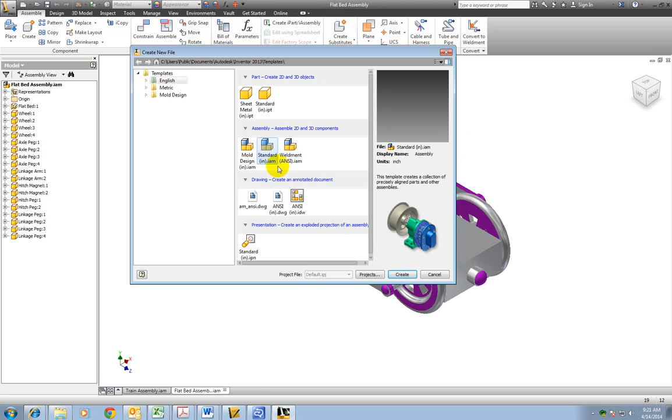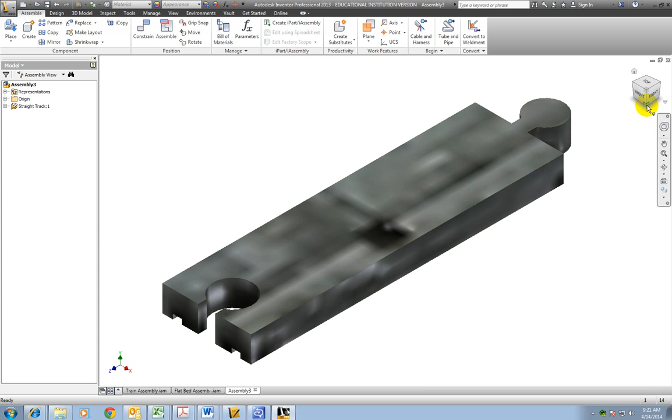Okay, the first thing we need here is the track. So I'm going to click place, go down here, pick up the straight track, open. Alright, now this I need to flip over because I want it sitting the correct way. This is going to be the item that I'm going to have as my ground. Okay.

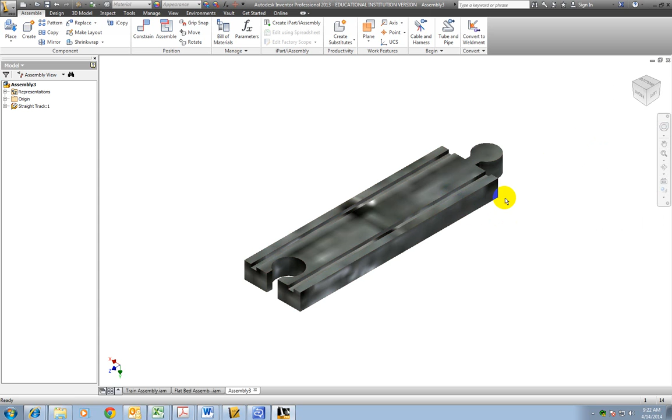I'm going to set this as my home view. And I'm going to put it at a fit to view because I'm getting ready to make it longer. Okay, so instead of constraining each track piece separately, I know it's going to be in a straight line and I want them all to be like one piece. So what I'm going to do instead of constraining them is I'm going to pattern them.

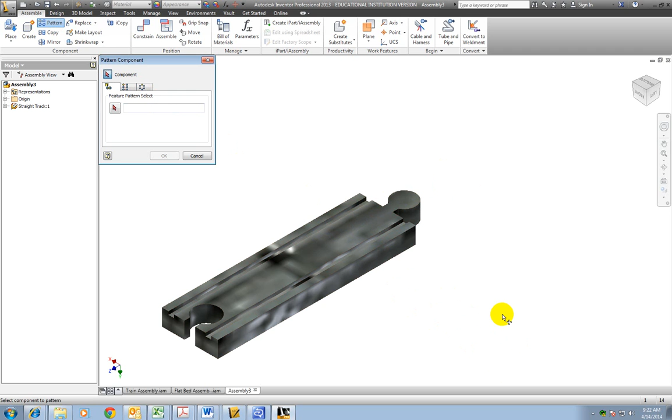Anytime you have more than one item and you're going to have it in a straight line or maybe even in a row next to each other, like if you're putting several chairs into an assembly, you would use the pattern. You can either do it circular or straight, which for me, I want it to be straight. So I pick the component and then I'm going to pick the direction. And of course I can go either way with this, whichever way I want it.

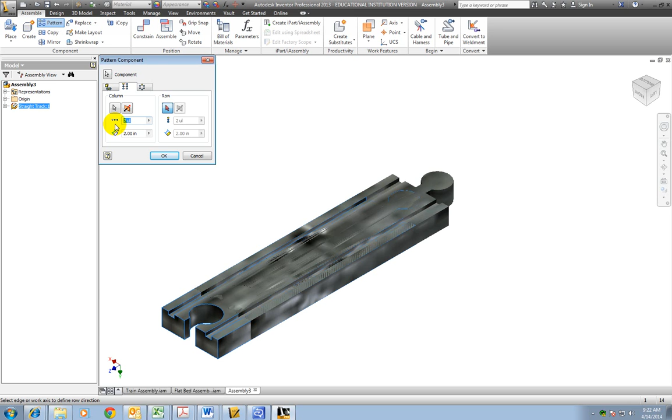Okay. This is how many I want it to be. As it says, it can go up to 2,000. I really only need anywhere from 4 to 6. When we start driving the train down the track, you'll see what I mean on that. I'm going to go ahead and make it 6. You can do anywhere from 4 to 6.

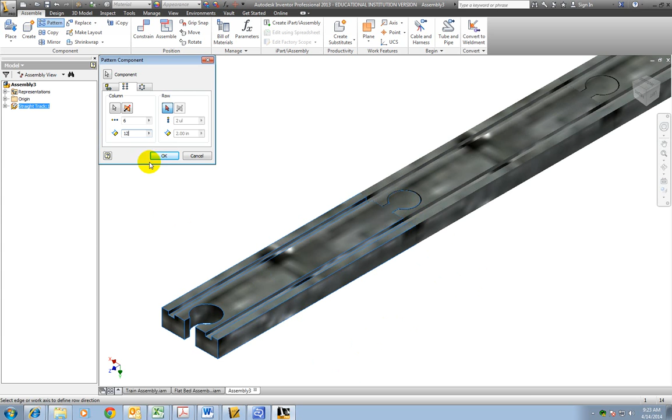Okay. Now, the distance of each of these pieces of track is 12 inches. So I'm going to change this to 12 to show that I need 12 inches between each one from the beginning to the beginning of the next one. And I'm going to click OK. All right, so now if I hit home, it's going to fit that to view. All right, so I'm ready to put the trains on it.

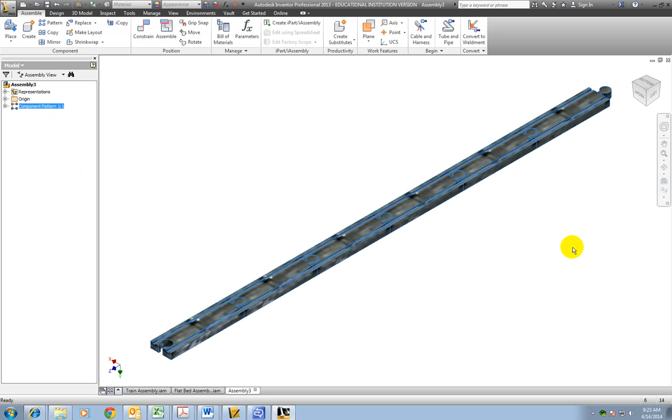As you can see how long this is, that's why I said you don't want any more than 6. And of course later, if you change your mind and you wanted to change the number you had, just right click and you could edit it. All right, but I'm good with what I have. I'm going to go ahead and save this. Save as.

And I'm going to make this the complete train assembly. You can name yours whatever as long as it makes sense, because you want to put the whole train on it and ready to drive. So that's why I say complete train assembly. I'm going to click save.

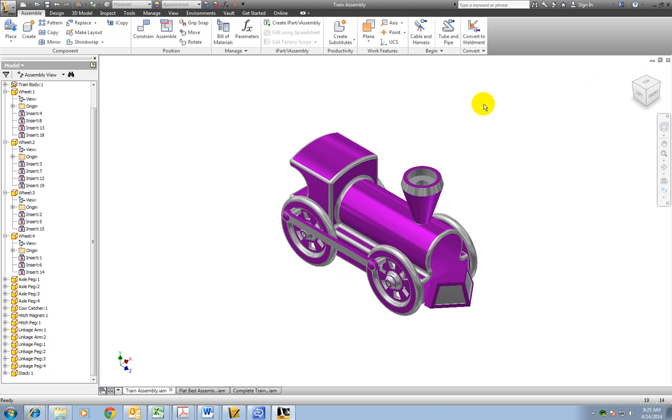So I'm going to have to constrain these wheels so that the wheels move at the same time. But to do that, I'm going to need a plane on my wheels. So click on the wheel, right click, and open it. Right, so I'm going to need a plane somewhere down the middle of this. So I'm going to put an axis on here.

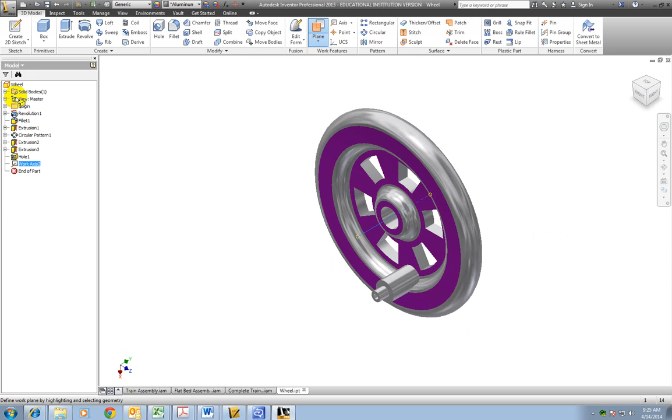And then I'm going to put a plane on that axis. Okay, it doesn't matter if it's 90 degrees or 0 or whatever, but go ahead and accept that. I'm going to save it so that now I can use that plane. Click save.

All right, now I'm going to go back to my train assembly, and now I have a plane on it. I'm going to click Constrain, and I would like when this one moves, I want this one to move at the same time. So I click on Angle, and I'm going to pick the directed angle. When this plane and this plane move, I want them to move together. I'll leave it at 0 degrees. Click Apply.

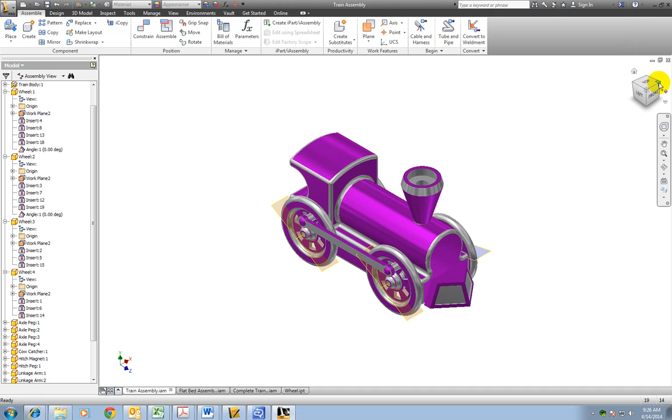Now when one moves, the other one's going to move at the same speed. So when this wheel is up, I want this one to be down. Now I'm going to click Constrain, Angle, the directed angle.

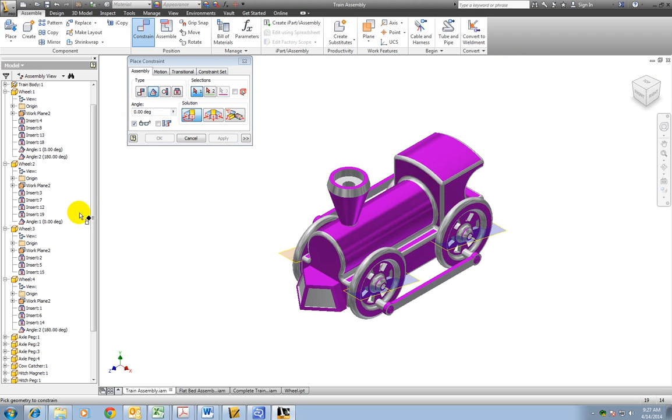When this plane is moving, I want this one to be moving as well. At 0 degrees, see this one's down and that one's down. So let's change this to 180. Now when this one's up, this one's down. Let me click Apply. Now when this one moves, the other one moves.

Now the problem I have is when this one moves, we're just kind of dragging this along. So we need to put that same angle constraint onto the other side, where they are at 0, and click Apply. Now when one moves, the other one moves.

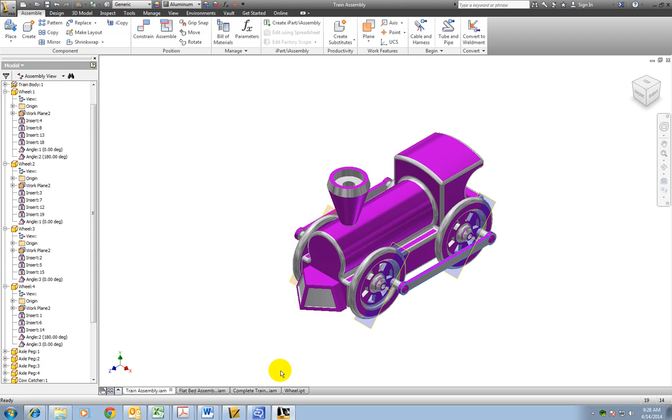Now I need to go - no, actually we'll put that on the flatbed here in a little bit. I just made a flatbed. You've made an actual train car, but I just made a flatbed because I wanted it for the purpose of explaining it to you. We're going to go ahead and leave the planes on there for now because we're not done using them.

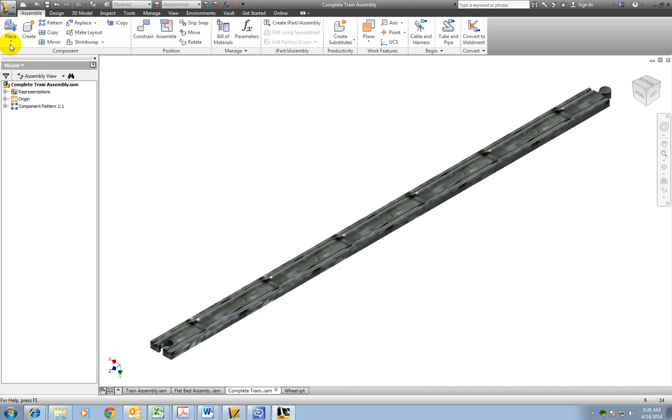Okay, so now I'm ready to put the train engine onto the track. I'm going to place my train assembly onto my complete train assembly. So I'm going to bring it in, left click, right click, OK. And I need to place this now onto the track.

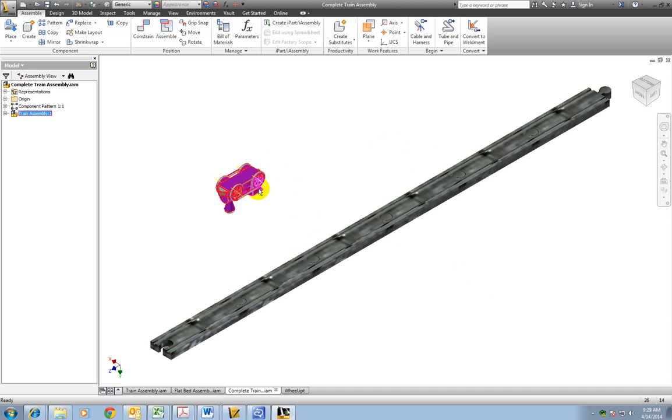Now, if it bothers you that it's upside down, remember you can click on the train, hit G, and it allows you to turn it around. Or I'll go ahead and leave it upside down, because as soon as you put the first constraint on this assembly, it's going to bring it into the direction you want it.

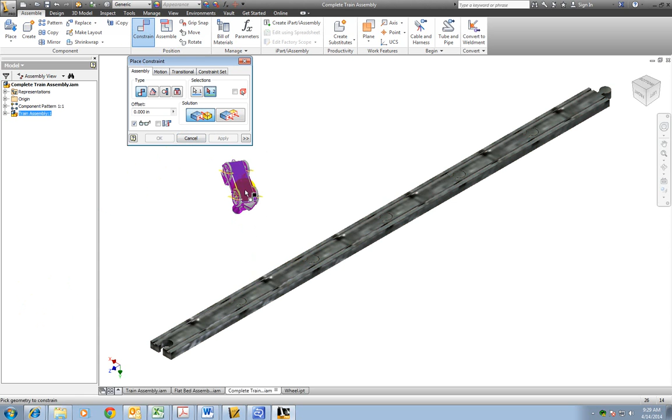Because when I click Constrain, and I'm going to mate the bottom of this train to the top of this track, it's going to bring it in the direction I'm wanting it. Now let's zoom in here for you. I don't want it actually laying on the track because it would be dragging, so instead I need to put an offset of 0.5.

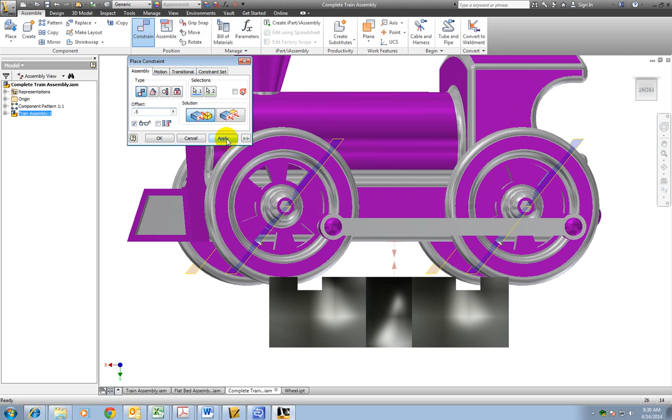I'm going to click Apply on this. And if it's not the right height, I can go back and change that constraint. Okay, so now I want to bring this around.

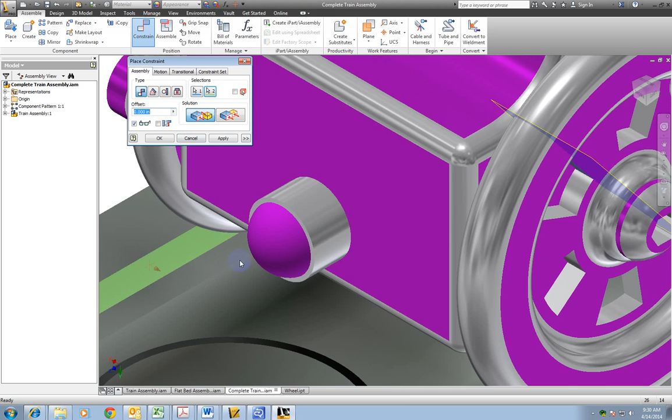So I need to mate this side here with the inside of this track. Now it's going the right direction, but don't hit Apply yet because it's dragging along the sides. So my offset, I'm going to put 0.05, and that looks about right. I'm going to apply this.

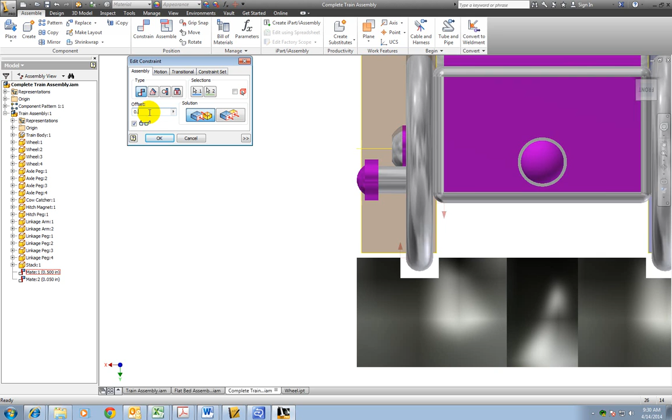They are not down in the grooves. So I'm going to go back to this train assembly, go to this mate, and edit it. Let's make that, instead of 0.5, make it 0.45. Yes, that looks a little bit better. Click OK.

And depending on your measurements, if maybe I looked at different dimensions, or maybe I made mine a little off, or you made yours a little off, those values might be a little different.

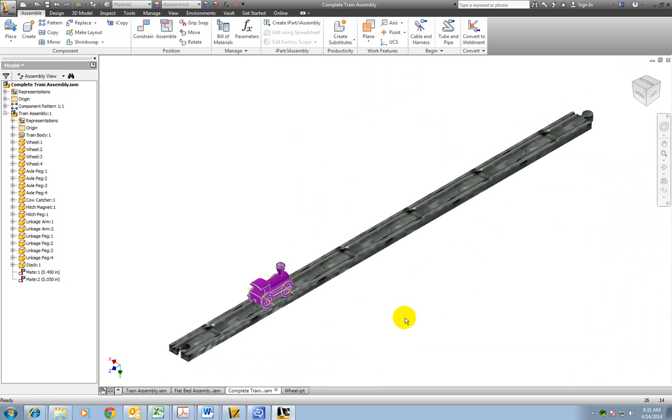So now, if I play with it a little bit, notice it'll go frontwards and backwards. Let's look at my degrees of freedom on this thing. Good, it still has this one degree of freedom where it can move back and forth, and that's what we want, because we're going to want to drive it down the track.

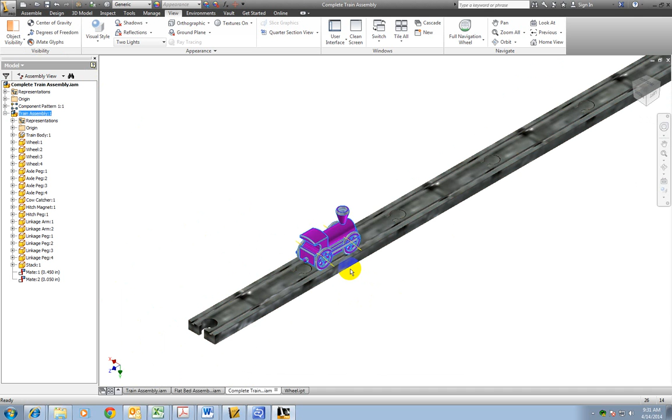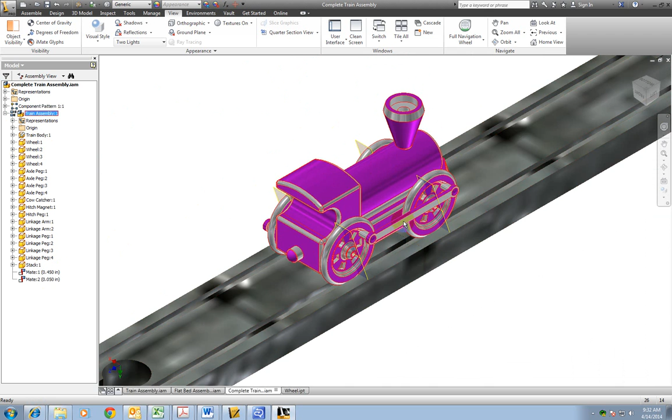Now, if you'll notice, when I move it, my wheels aren't moving. I try to move the linkage arm, it doesn't move. The reason is because I have to right click here and make this flexible. Now let's go ahead and constrain it a little more, because there's nothing holding it down. So let's go ahead and put a flush constraint.

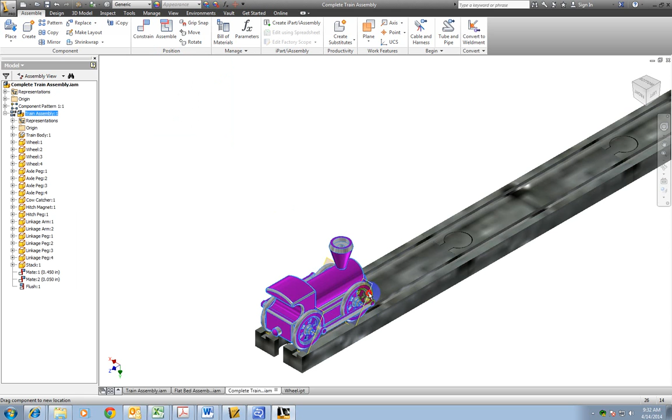Just to hold it in place, I'm going to flush the back to the back of the track and apply. It doesn't seem to want to move. Yep, there we go, I just grabbed hold of the wheel instead this time, and it's moving.

So good, we've got this moving now. The next constraint we need is when this moves straight, we want the wheels to rotate. To constrain that, we're going to use what's called a motion constraint. Click on motion, we've got a straight. This right here means it's a rotation translation, meaning when one rotates, you're going down like a straight path. This is if you've got two circles rotating. Instead, we just have a straight path and a circle.

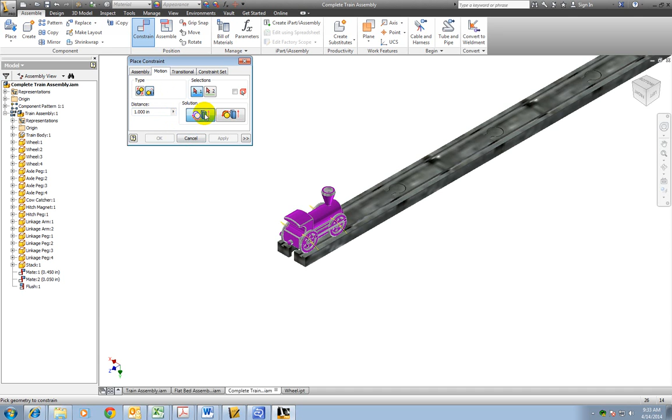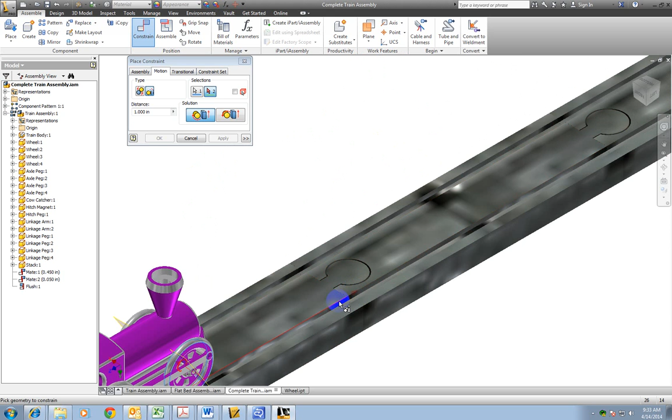So we want this circle, right? I'm clicking the outside of the wheel to go straight down. Let me make sure it's going the correct direction. There we go, notice how I've got an arrow going forward, and click on that one. So I clicked on the wheel, and I clicked until I clicked on an edge until I got that arrow the correct direction.

All right, now the distance. This wheel has a diameter of 2.25, or approximately 2.25. Now if I want the circumference, so when a wheel goes down the track, when it goes a full rotation, I want to travel the circumference. So say right here, if it travels all the way down the track, a full rotation, then that is the circumference of that wheel.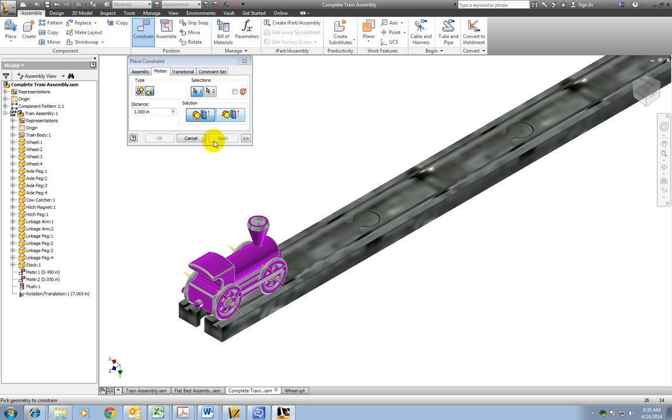So to find a circumference, it's diameter times pi. So the diameter is 2.25 times 3.14. Okay, and so I'm going to apply that. So now I've got this flush on the back of it, right? I've got this rotation, and it should work. Of course, let's make sure.

All right, so I'm going to go to this flush, and I'm going to right click, and go down to drive constraint. And you can drive any constraint you want, right? I'm going to click drive constraint. And I'm going to tell it to go, let's see, these things are about 12 inches, so 12 times, say, 4. All right, so let's just go down like 4 of them, so 48 inches. I'm going to push play.

All right, it's going awfully fast, I can't really watch it very well. So let's click the little arrow here. Just like anything else, you see a little arrow, it's like ooh, what's behind that curtain? What else can it do?

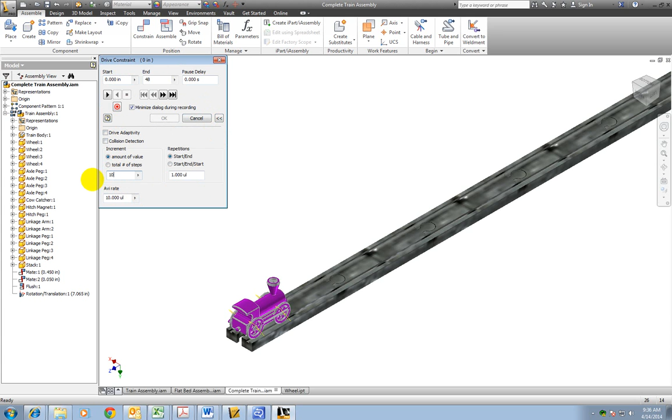All right, so we want to change this number. I think the larger it is, the slower it goes. So let's see, no, definitely not. Must be the smaller, the slower it goes. So 0.1. All right, so let's kind of zoom in there. Looks like it's driving pretty good.

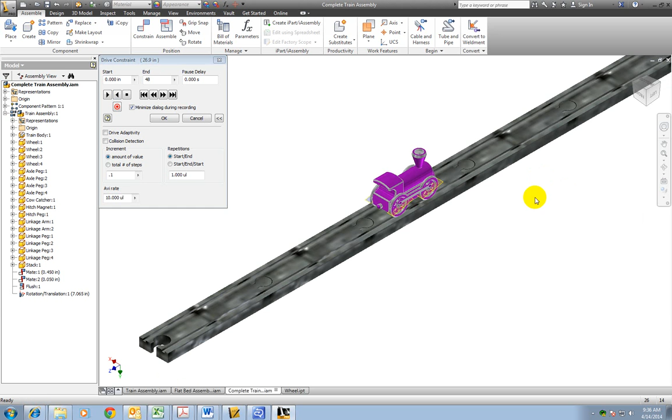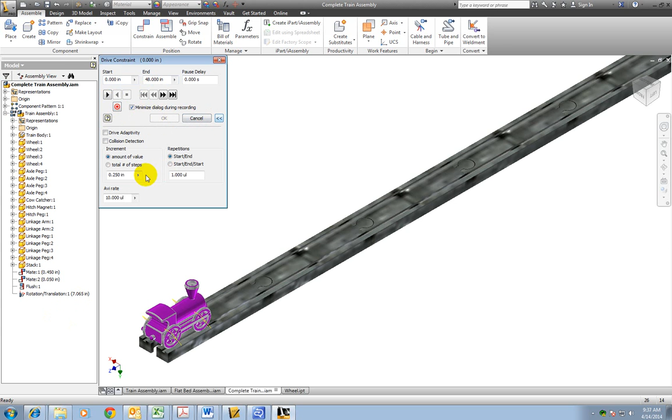They're both going opposite. All right, my computer's running a little slow today, so you can tell it's kind of a little jerky, but obviously I want it to go a little bit faster than that. So I am going to change this to maybe 0.25. Oops, of course I hit enter, that's not what I wanted. So I'm going to click drive constraint again. Make that 0.25 and then we push play. That's a better speed.

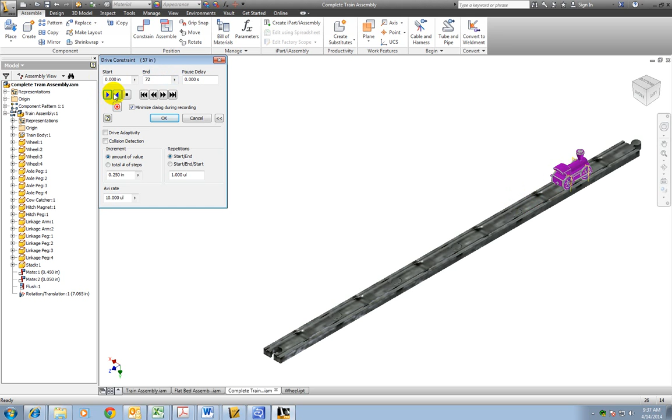Now if I want it to go all the way to the end, I would say 6 times 12 is 36. Wait, let me try that again. 72, keep an eye on me. 72, and I'm going to click. Oh wait. Yeah, so maybe a little shorter, my math might be a little off. But going down.

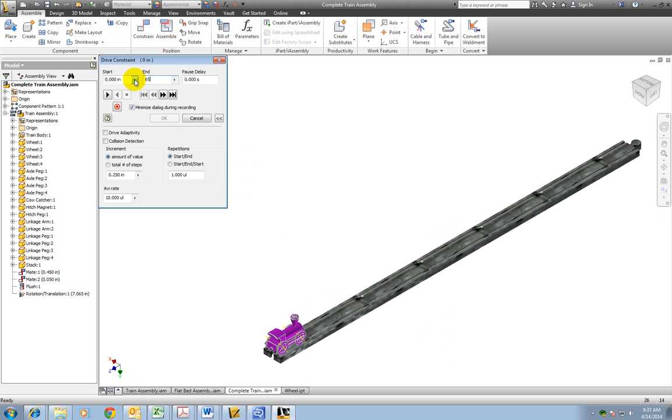Well, of course, I didn't count in the distance of my actual train. I'll just change this to like 65. Okay, push play. All right, so you get the point. So I'm going to click cancel.

And I'm going to rename this flush, because later on... wonder how that, okay, oh I know, it's not on the stack, it's on the train itself, it's on the assembly. Because later on when I come back, I want to remember which one I was driving. Because a few months down the line, you're showing it off to a friend or something like that, and you're like, which flush or which constraint? You're not going to know.

So we're going to double click on this. I double clicked on the name itself, and it lets me change the name of it. And I'm going to change that to drive train. Hit enter, so now I know which one I'm going to be changing.